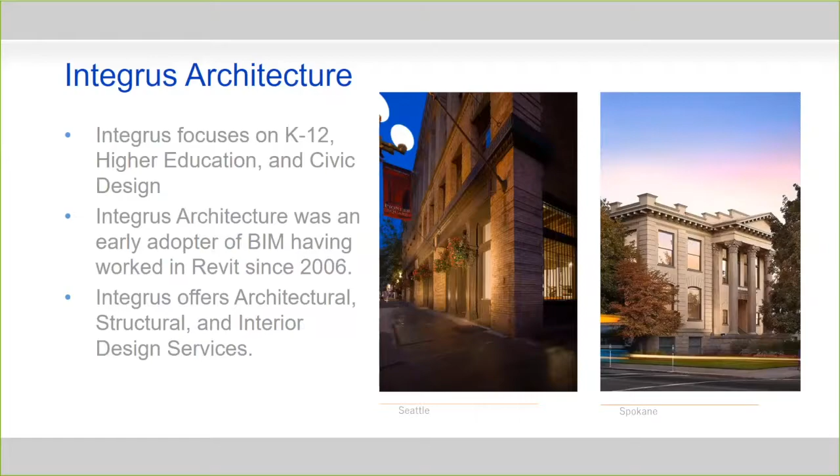And then our course description. The presentation provides case studies of building information modeling and masonry projects using tools available from BIM-M and commercial software. It will also draw on concepts from the document BIM for Masonry, Modeling Masonry Buildings in Autodesk Revit, and we will discuss the importance of BIM when moving from design to construction.

Learning objectives. Learn about current industry tools for use in Revit and masonry to further the building design and detailing. Learn modeling techniques for masonry use in Revit to further your construction documents. The case studies will show how BIM has helped with coordination of building systems such as structural, architectural, and mechanical, and then discuss at the end, if there are some questions, using the case studies, the appropriate amount of modeling for project delivery methods.

So our presentation today, we're going to cover information about BIM-M, why BIM is important, why masonry needed BIM, and what tools are out there currently. We're going to look at 2 case studies further in depth, and we're going to abbreviate another one. They are Park Place Middle School, Whitworth Music Facility, and Tyee Middle School. And then we're going to talk about what we do, some of our tips and tricks. Obviously, everyone has their own, but this is just some of the stuff that we have done and have been doing as a firm.

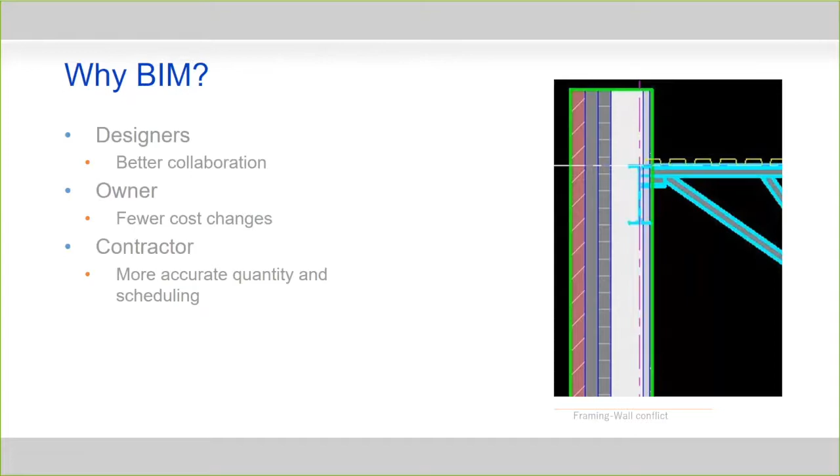So BIM-M is an industry initiative to unify the masonry industry and all supporting industries through development and implementation of BIM for masonry software to facilitate smoother workflows and collaboration across all disciplines from owner, architect, engineer, manufacturer, mason, contractor, construction manager, and maintenance personnel.

And why? The reason is other industries have invested heavily in BIM. I know steel had their own projects, concrete has their own initiative. There's a lot of add-ins for wood, cold form, a lot of national groups. But masonry tended to be more localized in nature. Out here we have the Northwest Concrete Masonry Association. Obviously we have the NCMA. There are also some national groups, but as an industry, it is a lot more localized.

And so the goal is to speed up and provide better tools for the industry. If you had opened up Revit 10 years ago out of the box, there was really nothing for masonry. You had tools for steel, you had tools for concrete, but masonry kind of just got looked over. And so the whole point of BIM-M was to provide resources and tools allowing designers to efficiently move to BIM if you're currently in a CAD format.

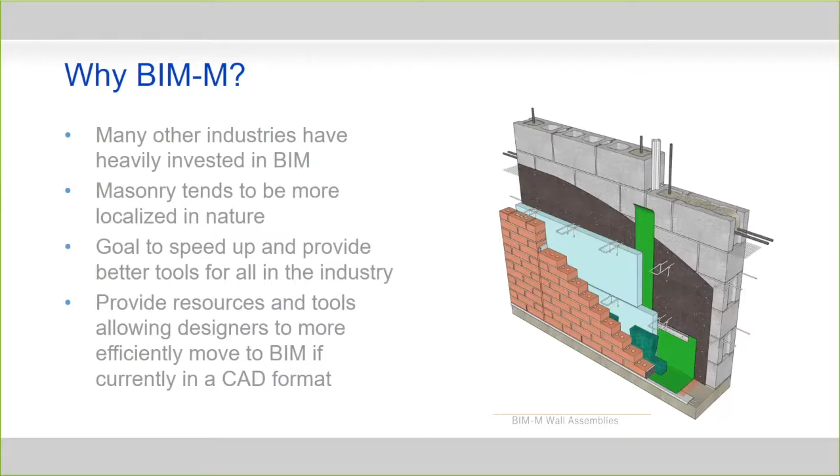And one of the things that they found was some designers were actually shying away from masonry just because it seemed like it was a cumbersome product to use in Revit. And that's what really kicked off the BIM-M initiative.

And so the tools that they have so far created: we have the Masonry Unit Database, which just got released. There was the BIM-M Users Guide, which has been out for about 3 years now. BIM-M has funded CTC Express Tools, which is an add-in for Revit that gives you a whole library of both 3D and 2D content that you can use. So if you're just starting to move to Revit and you don't have a lot of content pre-made in your library, you can use this to help start building that library for you.

And there's also future tools. They're currently working on some more 3D stuff that will help you model bond beams more efficiently, vertical reinforcing more efficiently, and help with the collaboration. So it's something that's put out there for you guys to use. Almost all of it's free. If you go to bimformasonry.org, you can see all this information that's been provided for you.

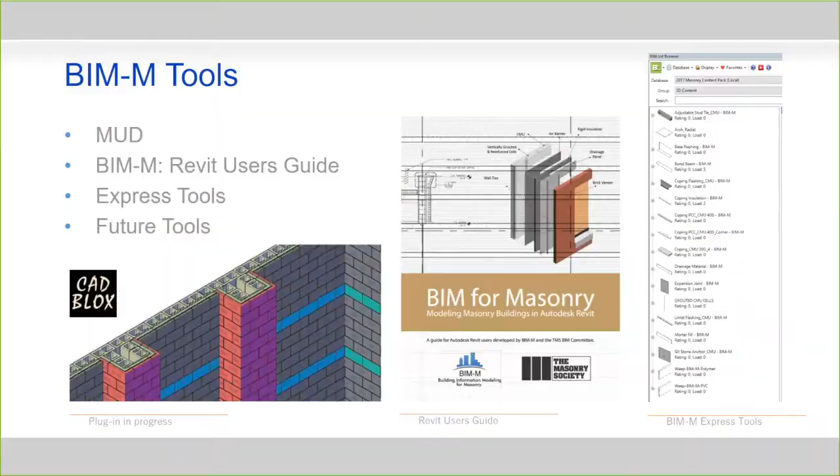And now we're going to get into some of our case studies. Personally, I always love this photo just because it shows going from SD to the final product, and it just does a great job. We start up in SketchUp in the top left, and then the final photo with the students on the right. And you can see kind of a construction model, the design model, the SD model, and some renderings, and kind of just how it all came together.

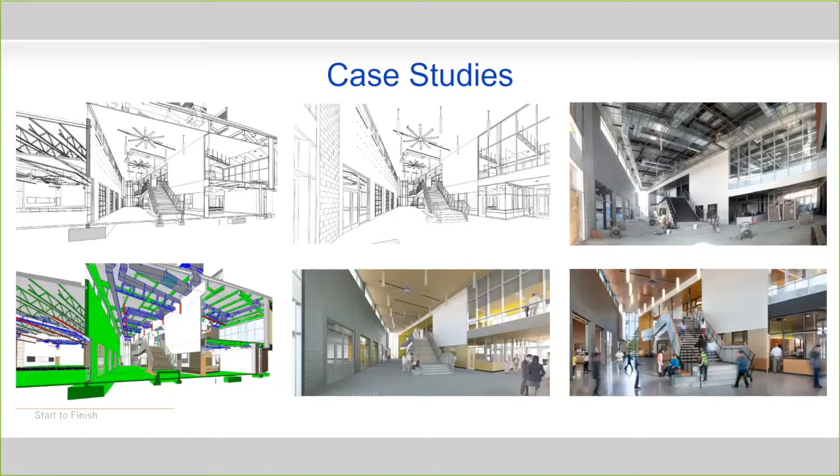So our first case study is Park Place Middle School. It was a brand new middle school and a seismic retrofit of the existing gymnasium. It was 120,000 square feet of new school and a 20,000 square foot renovation. It was done in 2.5 phases. All was done in Revit, including the phase sequencing. On the left side was the existing gym and the off gym addition, and then the right-hand side is the new portion.

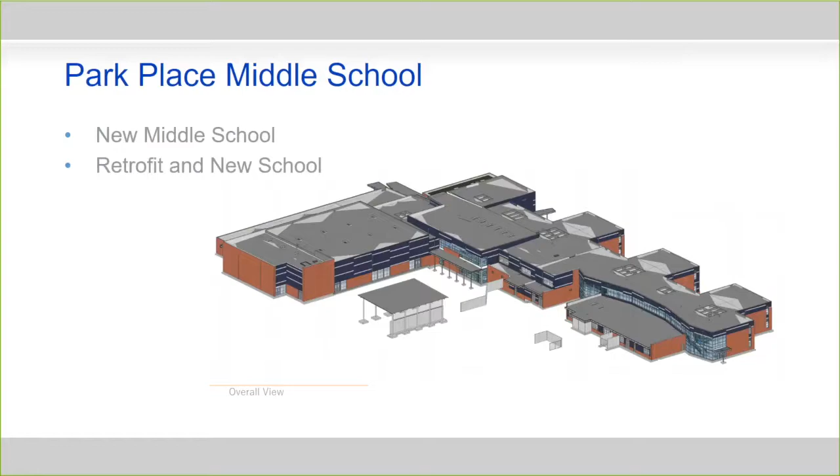And here's a view from the other side. It was all load-bearing CMU with veneer and metal panel siding. Brace frames were proposed, but load-bearing masonry offered a cost-effective solution that allowed us to get that final result we wanted without losing the square footage that comes with brace frames, box-around columns, things of that nature.

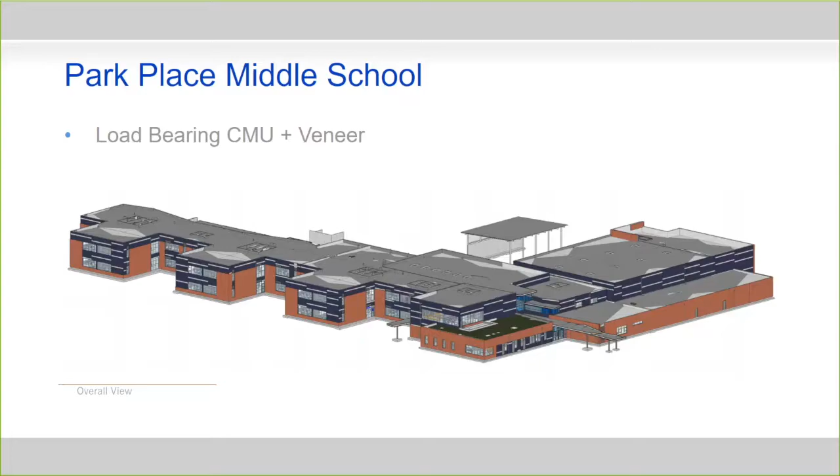So for this project, Revit was a coordination tool and a production tool. It was the first program I opened in the morning and the last program I closed. It was really my main tool for both the construction drawing set and even structural design.

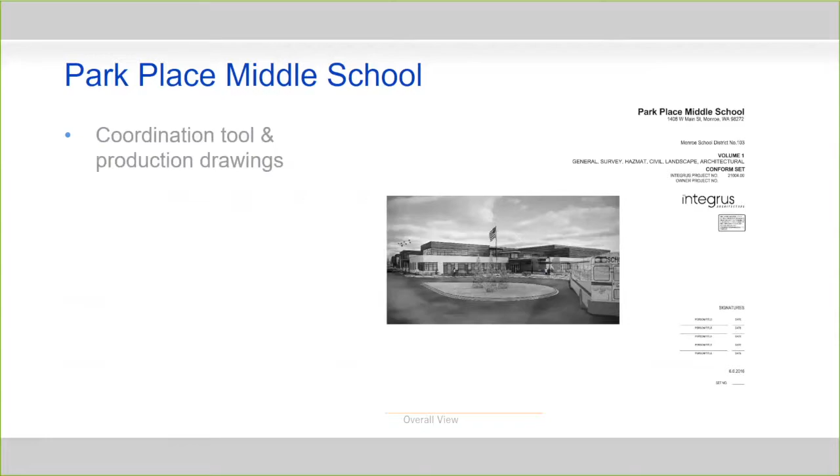So coordination was huge. So for instance, here we have some mechanical ducts, and they're located on the right in red. And we were able to handle issues before they arose. So this took place about 2 weeks before we went out to bid, and we were doing a final sweep through of mechanical, and we noticed that one of the ducts was going to be cutting right through the end of a wall, right where we have really 3 beams coming together and going to be bearing directly over this.

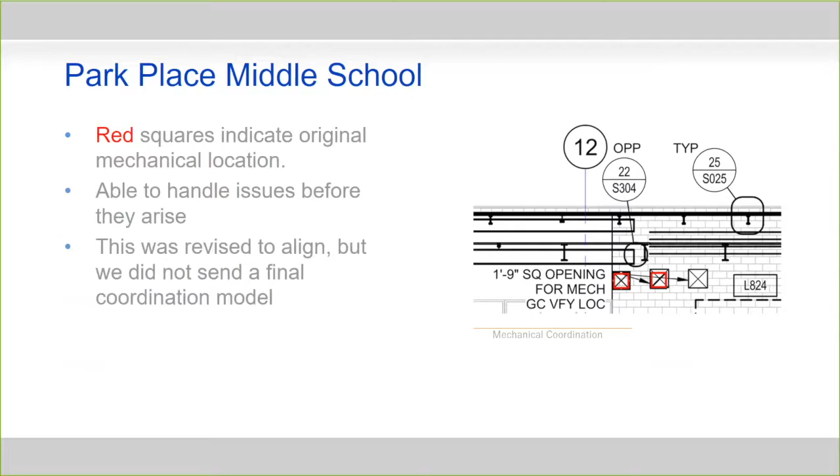Had we not caught this ahead of time, this would have been an RFI, a change order. We would have had to pay for extra duct work to route it around the edge of the wall. So we were able to fix this ahead of time. The reason you're seeing this coordination view is because we caught this right before bid, and so we didn't do a final model swap, but mechanical did shift their ductwork over about 5 feet, cleared the wall, and when I went out on site, no conflicts.

If we go through that same section, you'll notice if you actually measure, we missed it by about an inch. But the biggest advantage is everyone was on the same page. We noted it, the GC saw it. They'll go through and model everything again for their BIM coordination, but it's way easier to catch your mistakes 1 year before it gets built.

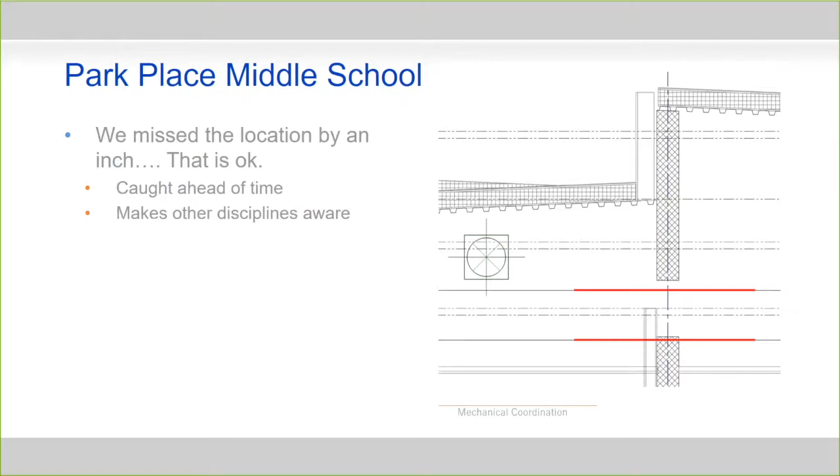We avoided the RFI, like I said. It would have been about 20 feet of duct. They would have had to bring masonry back in. Just a lot of problems get solved. And the delivery method helped on this one as well, because we did have a contractor on board. So not only did we have our own eyes on it, but we had a contractor's eyes on it too, looking for conflicts such as this.

And again, here's another MEP opening we needed. The left was our drawing, and the right was what was built in the field. As you can see on the drawing, I had assumed it was a square opening. On the right, it was 2 round. You can't always guess 100% what the openings are going to be, but the whole point is you're letting people know.

And that's one of the big advantages. We can go through, we can see where the ducts are going to approximately be. If we need to, we can dimension, place 4 feet away from the edge of a beam, things like that. And that's why we also make the note, GC to verify the final size and location. It's just helping make everyone aware. If we don't put this on our drawings, a mason, when they're going through their coordination drawing, they're not going to see it either.

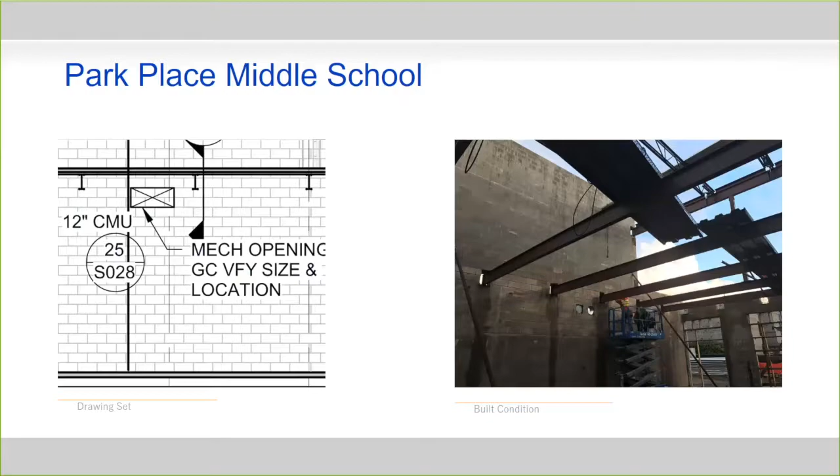One of the things is we don't model everything in Revit. You hear a lot of stuff about people trying to model everything, and it becomes really hard and cumbersome. Here we have a huge amount of reinforcing in this wall due to the opening and the fact it was also a shear wall. And so this would have been really hard to model. So we modeled what we needed to, but we picked up a lot of our own stuff with line work on the base, and then we bring in those other coordination models to make sure that everything will in fact fit. But here you can see our lintels, our vertical bars, everything.

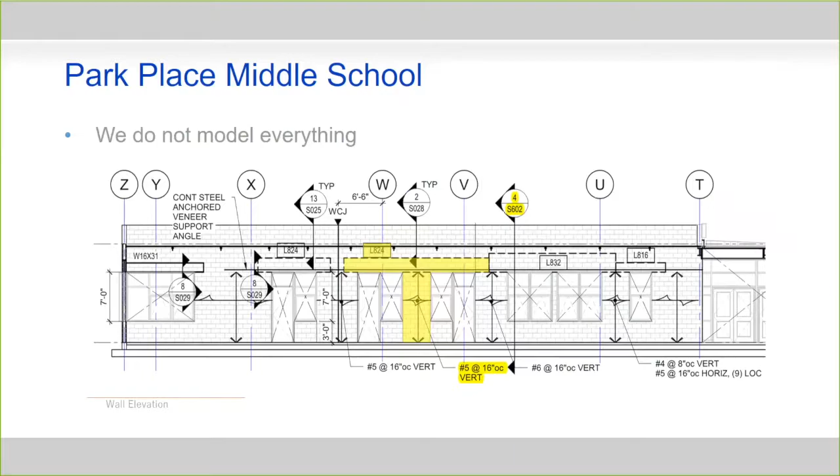But if we go to that building section, we did model things with a purpose. So we modeled our lintels over openings that way they can make sure everything coursed out architecturally. There were no issues with the openings. They weren't going to need to cut anything on site.

In some projects, it wasn't this one, we have modeled certain things like this so a contractor can do a quantity takeoff. So that's really helpful depending on what your deliverable is going to be. And also, if you have conduits or things of that nature, you can look for conflicts, like at the head of a storefront, how stuff is coming together.

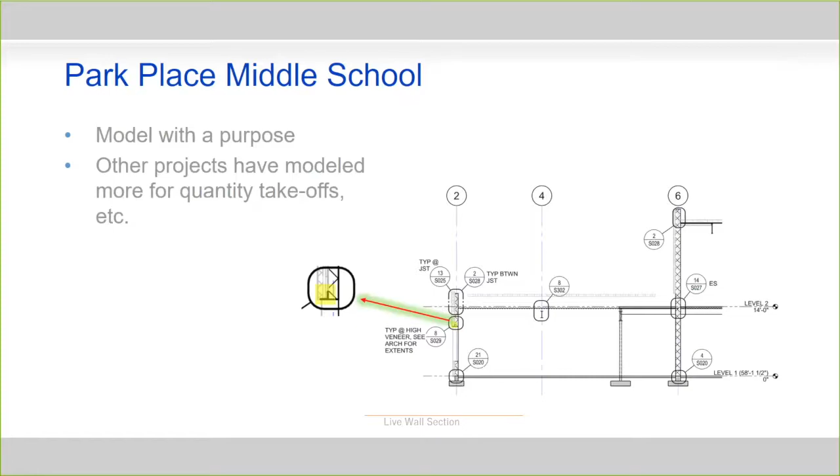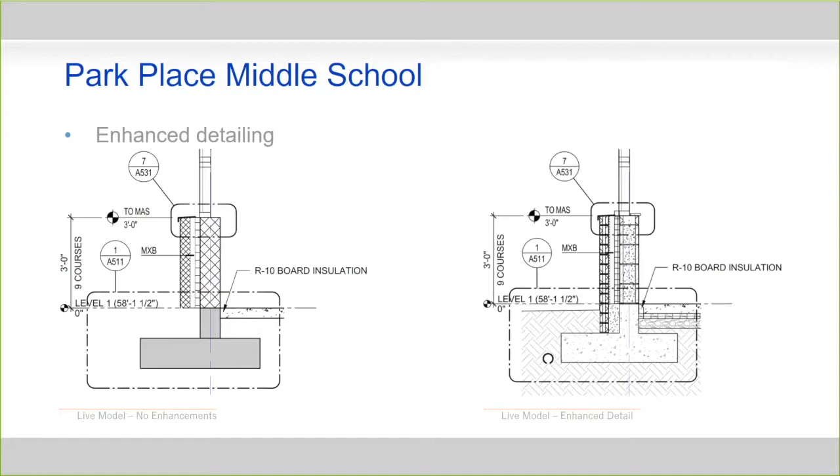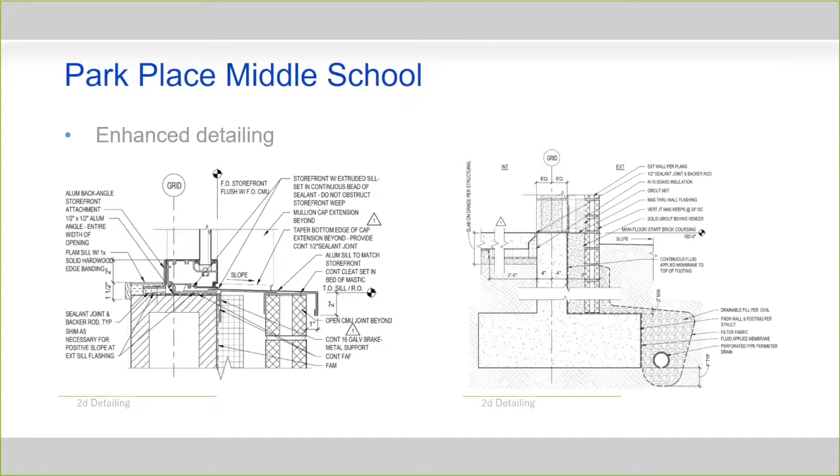And again, here's just another example of that. Within our office too, we'll get people that will use, like this one on the right, a live model and overlay it. And the biggest benefit there is as stuff changes, you'll see your detail component no longer aligns with your model items. So it makes it a lot easier to track changes that way as well. Did something slide you weren't expecting to slide? Because you have these 2D detail components overlaid with the 3D, it's really easy to see conflicts like that.

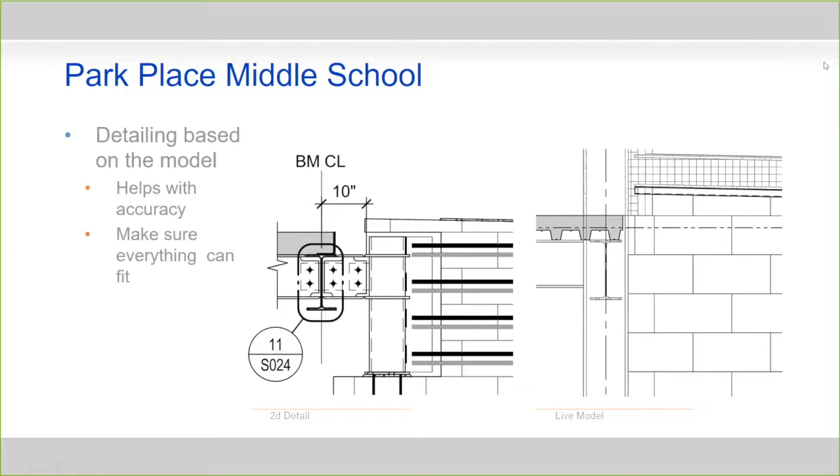So this is a drag strut connection, and as you can see in the model, that beam's 2 inches away from the end of that CMU wall. So I was able to make sure, place it 10 inches away so they could actually get the connection in there and make sure it would all fit.

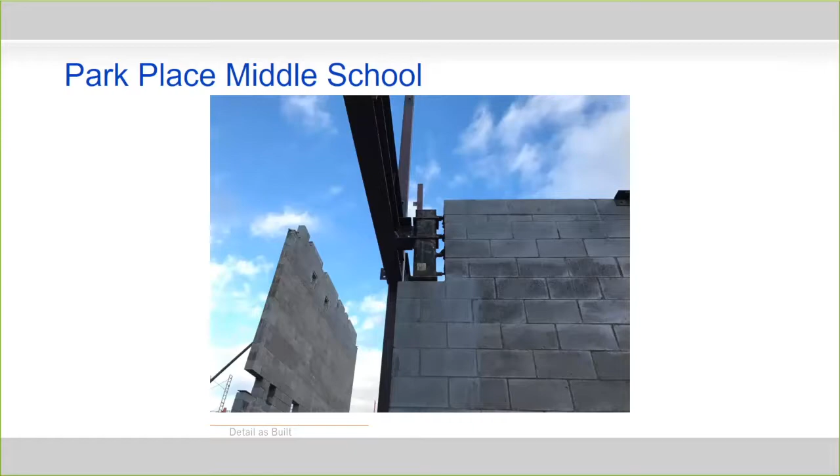And here was the final product, how it turned out. The GC, when they built it, had no problems getting it together. The masons knew exactly what needed to happen, where it needed to be. So by just using the model to enhance our detailing and help figure out problems like this in the construction field, there were no problems. And this was one where I was concerned that we might have had some conflicts.

Another one is our detailing based on as-built. That's another big benefit: we had our as-built for this project for that existing gym retrofit. When we went through, we realized that the existing building was off by 4 inches in the bottom 2 corners. One side was about 2 inches further north, and the other was about 2 inches further south than they were supposed to be.

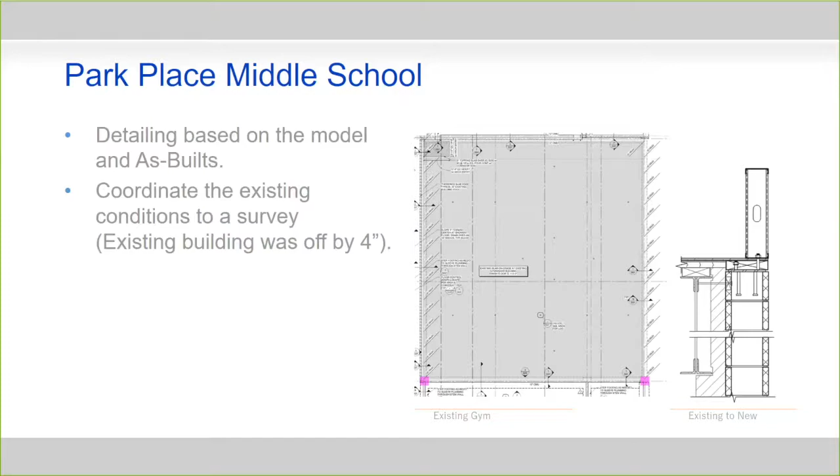And what this allowed us to do was figure out how this is going to exactly come together. The original thought was we were just going to put the new wall tight to the existing wall, but we had this skew we needed to worry about, so it allowed us to look at how we want to connect this. Do we need to look at anything else? How is the existing roof connecting to the new roof? What's the best way to handle something like this?

Our second case study project is the Whitworth Music Facility in North Spokane. This is a new music facility designed to help the program with issues of outgrowing its existing space. We added a 22,000 square foot addition with a minor renovation to the existing structure. The front portion that is seemingly clad in brick was the new addition, and the existing is on the right-hand portion of your image.

Integrus is the proud recipient of the 2017 Robert Fraser Excellence in Masonry Award for this building. We've also received a few recognitions from the AIA as well for this project.

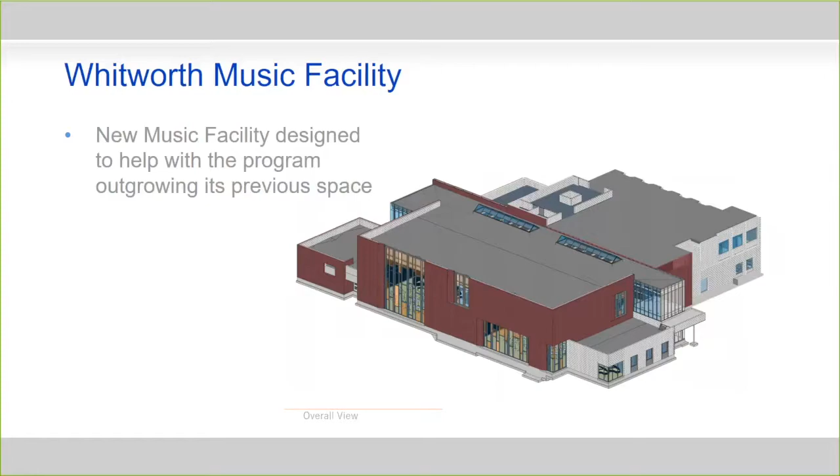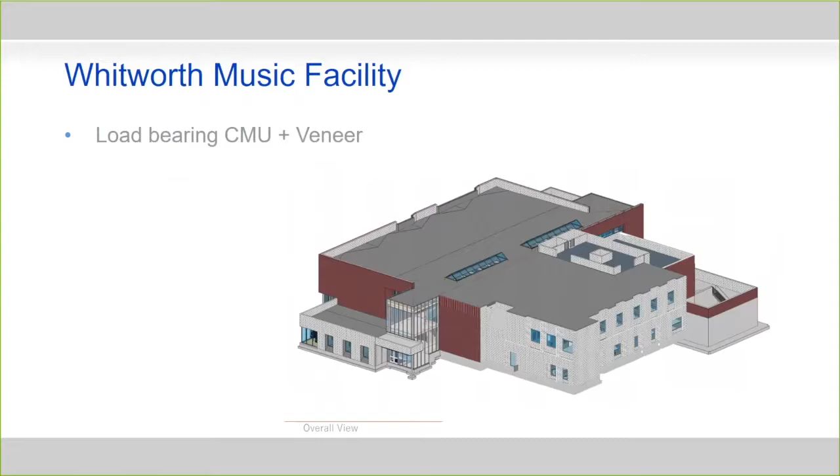So in this project, there was a significant amount of load-bearing CMU and veneer. If you actually look in the lower left-hand corner, I'm going to be discussing this double cantilevered opening, just to give you an idea of reference of where we are on the project. Our biggest feature was, in fact, these double cantilevered lintels. The joists penetrated the lintels. Structural engineers had to detail everything to transfer all these forces.

One of the biggest reasons, as Morgan was discussing a while ago, that we don't model everything, mainly rebar, is that you can see in this kind of an image how much congestion we would have. We are blessed in our market as of right now. We don't have to do all the modeling, but that time is coming. So being on board with how to get things done early is going to save us a whole lot of headaches later on when they do require us to model everything.

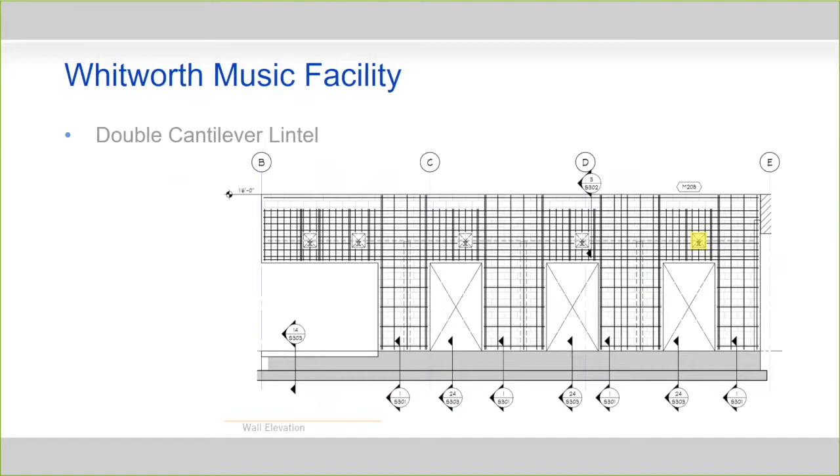As you can tell also, I've got highlighted on the right-hand side one of the openings. The ability to see everything in a 3D model is immeasurable for coordination. Again, this is another perfect example of how congested our rebar can get. The ability to use Revit is, as always, fundamental. We also use Navisworks for clash detection. However, the reality is we're getting so much out of our Revit environment because we're utilizing both structure and architectural teams together.

In this portion, there is a 40-foot main lintel adjacent to a 10-foot corner lintel that connects to the other side that you kind of saw in the previous picture. This is also the same corner that I showed two slides earlier, that corner condition of window glazing. Thankfully, on this side, we didn't have any penetration through, creating an easy coordination with our consultants. Our hyper-modeling, while maintaining low data for things like the rebar, allowed us to preemptively coordinate everything, and we completely eliminated RFIs on anything related to the masonry and our double cantilevered lintels.

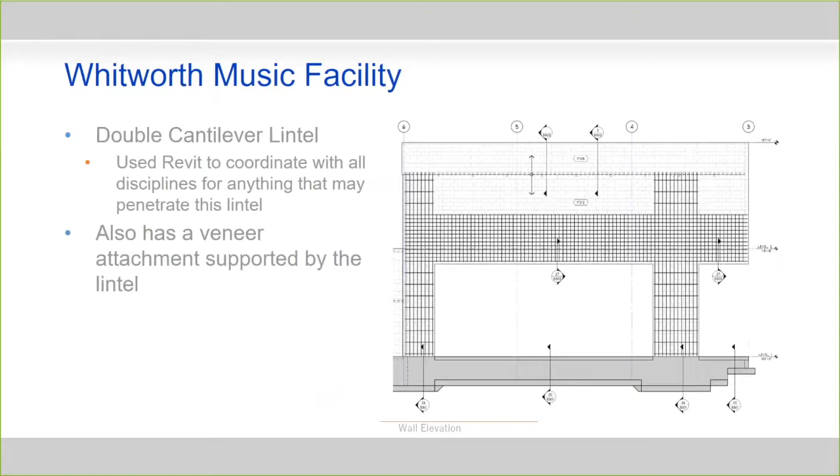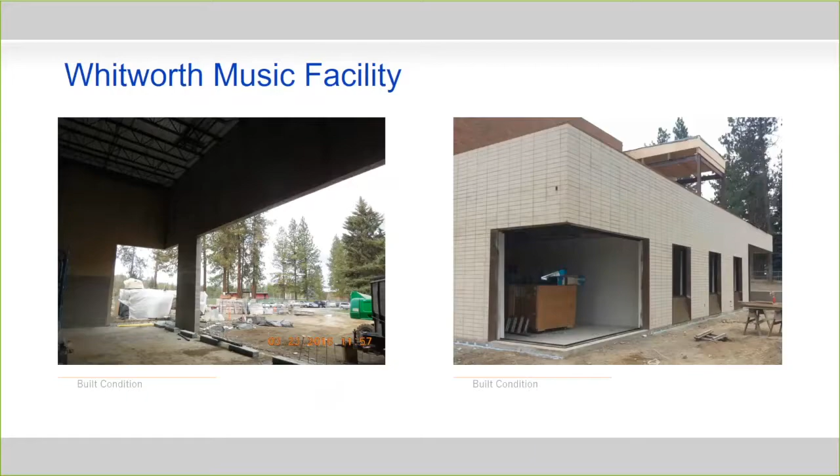Here's a simple view of the two different double cantilevers. The smaller, shorter one on the right is the one that I was actually highlighting a while ago. The larger one on the left is the 40-foot opening that you saw in the previous slide showing all that rebar. And then there's this final image of the finished product. Admittedly, this image, in my opinion, doesn't do justice to the project. The client has been so content with the result and the cost savings due to the lack of RFIs and the clarity and coordination that we had, that they actually immediately turned around and hired us for two more projects. And they put a special emphasis on more CMU and masonry to be used on those projects for the sake of continuity across the campus.

We've also received incredible praise from the students. One of them is a piano player. You can see that this front corner room right here is actually the piano practice facility. They praise the fact that they've got this open view to the whole campus.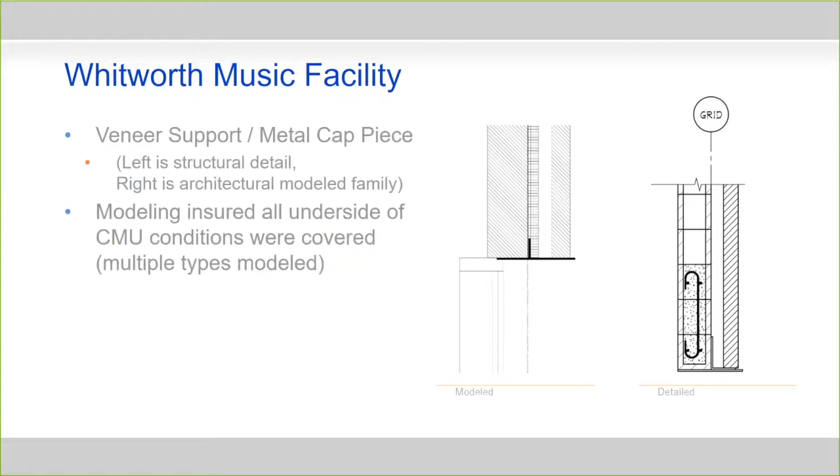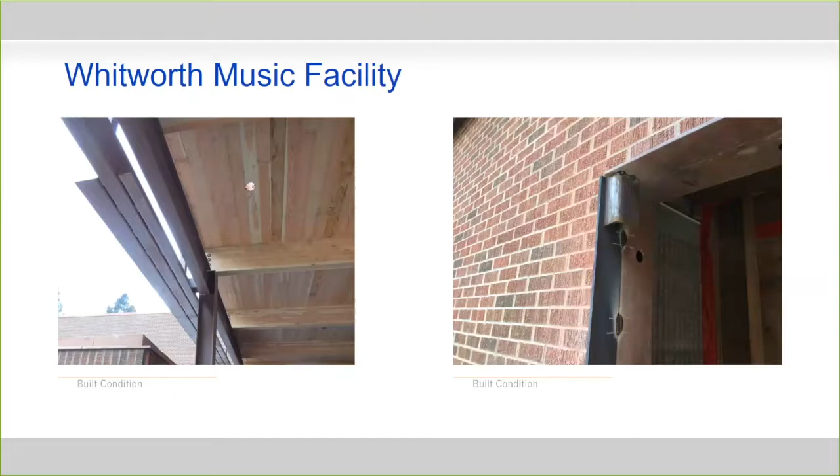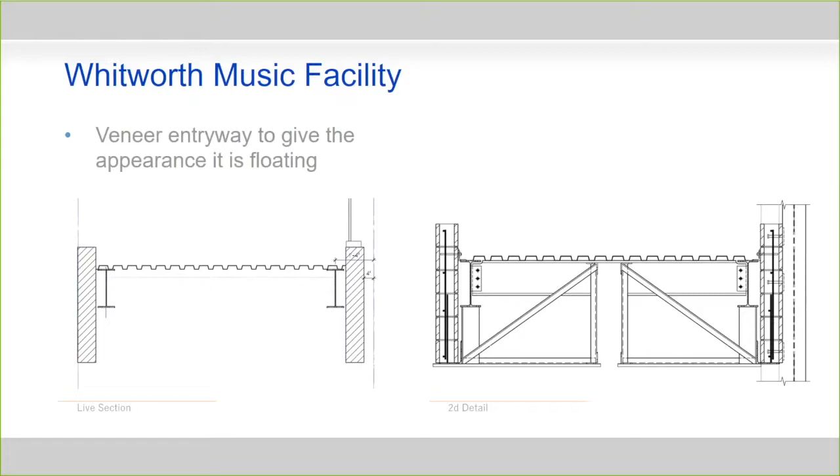To beat a little bit of a dead horse here, here's another slide showing the difference between the live section. Now, admittedly, this live section doesn't go deep enough to show, but we have modeled the rest of the beams. However, on the right-hand side, what you're seeing is the 2D detailed element of everything for the construction documents. And here they are overlapped. So really, we're getting everything accurately drawn for them. We're getting everything taken off properly. And that's all the information we have. So not everything needs to be modeled up front, but sooner or later it's going to show up. It's going to be clear as can be.

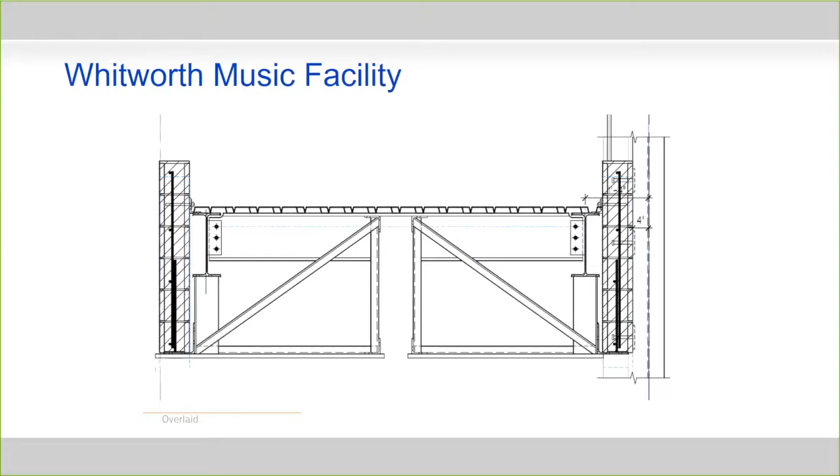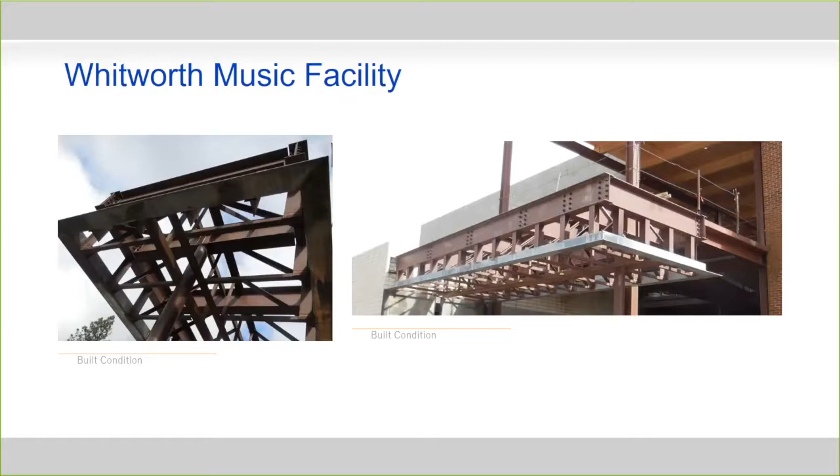The end result in this condition is a very nice floating looking section of masonry. The walkway looks like it has just this nice thin wafer hanging over it. We have stood on site and just watched people walk in, and they walk in with this look towards the sky like something's about to fall on them, yet it's just beautifully coordinated.

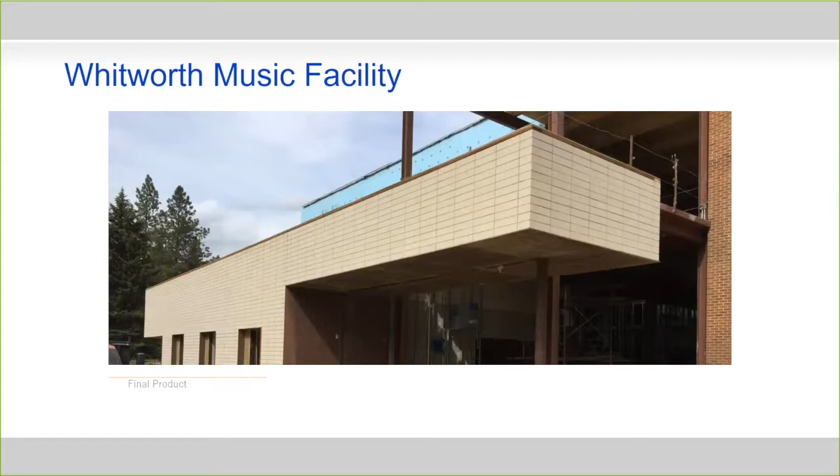So now we're going to talk about Tyee Middle School, which is in Bellevue, and we're going to just talk a couple highlighted elements of some of the BIM use when we were working with masonry on this project. So one of the first things is coordination. So our consultant in this one was using 2D AutoCAD. This project took place right after the firm became a full user of Revit. Our consultants weren't required to be full users of Revit at that point.

The reason is when you're working on those 2D, a lot of the time it was simple lines. The coordination was hard to overlay. And here, even though we were in Revit, because our consultant wasn't, we weren't able to catch these ahead of time. So it became an RFI, go through that whole process, having to do field fixes. The project slows up a little bit. So it really shows how you can catch stuff ahead of time. It really helps you with your whole team being in Revit.

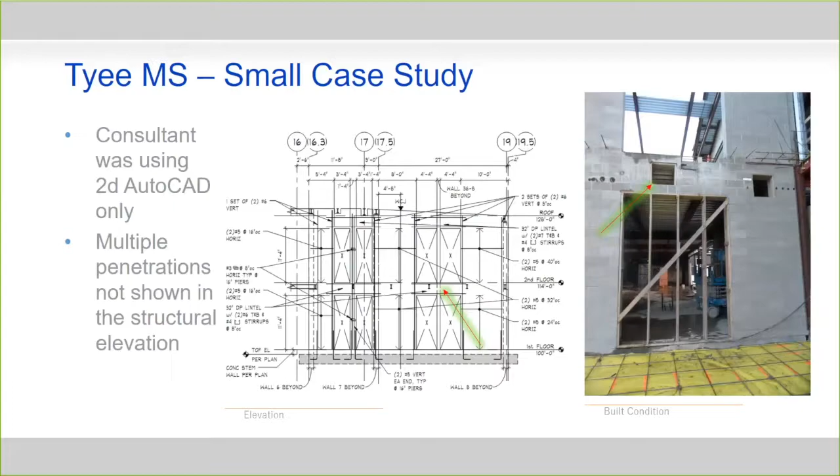And general contractors, too, are getting on board with BIM and Revit. On all the projects I've been on now, they're doing Navisworks collaboration, Navisworks coordination. Some of them are even starting to give us submittals that they did in Revit for their self-perform packages.

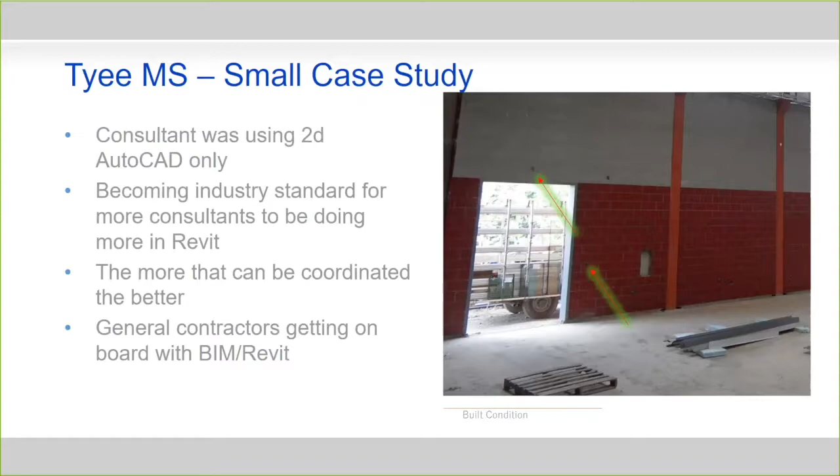And the last one from Tyee was a high window. So the window basically went to the underside of the beam, and because of the construction, they needed a solid surface to mount to. And if we had our standard beam pocket at some of these windows, it wouldn't have been constructible because the glazing install would have happened before they were able to do the grout backs at the beam pockets.

So instead, we were able to coordinate it, notice the issue with these beam pockets and how the storefront was going to be installed, and we were able to go through and switch to these embed plates. We went through the entire project and swept for all these conditions. And it was, again, someone in BIM noticed it and said, oh, we might have this potential problem. And they went through and talked to a GC and said, yeah, you're going to have a constructability issue. So again, solving problems before they happen.

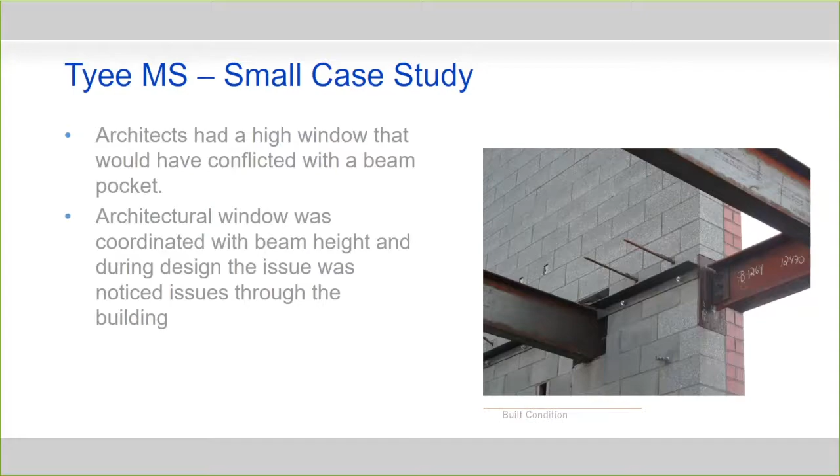So our design and documentation process includes a myriad of software solutions. Revit is obviously the biggest one. There's other solutions. There's ArchiCAD. There's SolidWorks. There are other solutions. We also leverage Navisworks in-house. We also have other software such as Enscape for our presentations. We've been dabbling with Google Cardboard for walkthroughs at different stages of construction.

Navisworks allows us to do some quantity takeoff as well as the clash detection. And then there's other new ones to the market, such as the CTC tools, the Express tools that Morgan was mentioning earlier. CTC Express Tools is actually supported by the BIM for Masonry organization. It has a myriad of stuff in there. It's updated frequently, so that's definitely something to look into.

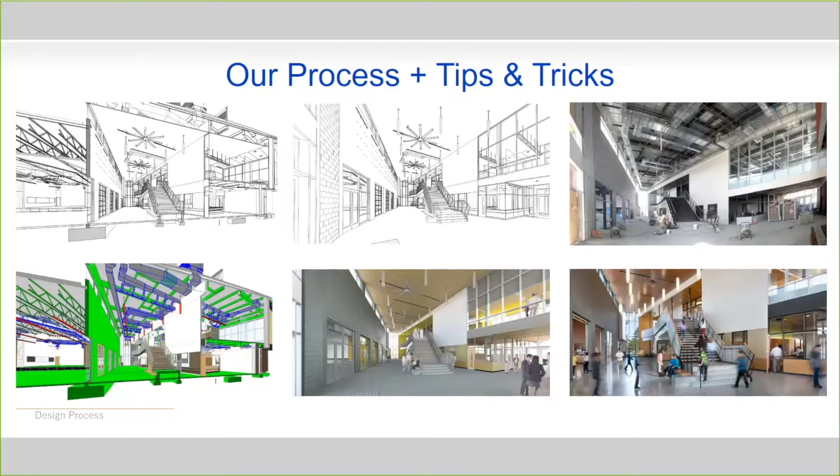When we discussed this image earlier, it's just a great representation of how everything comes together in a way that is accurate based on what our design intent was and everything we did for coordination. So you've heard us discuss a little bit the idea of a one model. We are admittedly blessed. We have structural and architectural and interior design all in-house. It allows us to reduce the duplication of information.

The majority of firms in the industry, what is happening is that the architect is drawing something to show his intent. The structural engineer is using, within Revit, for example, the copy monitor tool for load-bearing walls. The architect is having to coordinate with that. It creates a duplication of effort, which is duplicated man hours and therefore a loss of profit for everybody. The other beauty of a one model environment is that it forces more collaboration. That collaboration inherently creates more cohesive team members, and a more cohesive team is just better for everybody.

There's obviously, as we've discussed several times, the near instant clash detection, and then there's the non-project specific changes, the increase in communication like we were saying, and then lastly is the rise in profit. For many years, actually, when we first integrated Revit, we were using the traditional path where the structural team had its own model and the architectural team had a model as well. Our coordination was definitively better than most environments where you're in two separate buildings. However, we realized that being in a one model environment was a fundamental thing that we had to invest in.

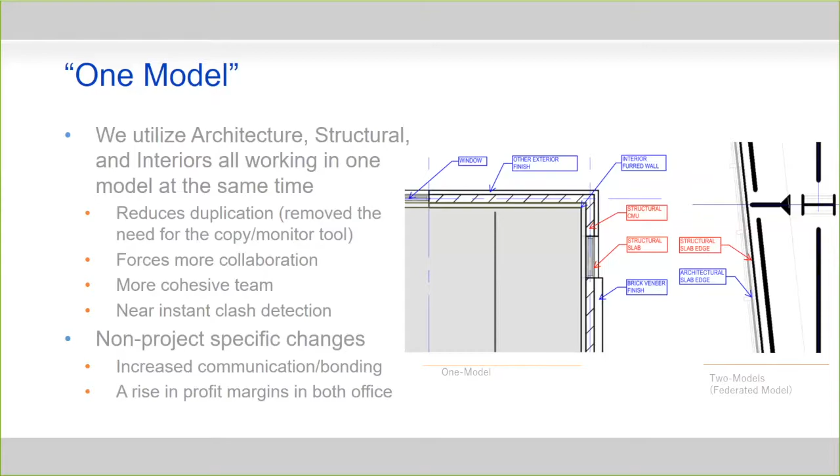So we're going to discuss a few things that we do for our modeling. One of the things we do, I didn't put it on the insert here, however, we also often have separate walls for our structural and our architectural teams. So we break down the walls to a structural level that allows the structural team to manipulate their walls, and then we skin it with a finished architectural wall in front of that. It sounds a little bit more tedious. However, it actually lowers the number of wall types you have.

The number one problem I see is teams will try to make a wall type that goes from the interior face all the way to the exterior face, where it includes everything from the CMU to the studs to the drywall to the brick veneer on the outside. And the problem is literally you will turn the corner around the building and you'll wind up with a different condition. So they have to make a whole new wall type to answer to that one

specific condition. If you break it down so that your interior furring and drywall finish is one wall type, chances are you're using that elsewhere. And then the middle core of CMU is a second wall type. Chances are you're using that somewhere else. And your exterior finish literally handles just the airspace and the brick veneer. Yes, it makes it a little bit more confusing because you've got three wall types, but the reality is it's so much easier for the users to manipulate and change things.

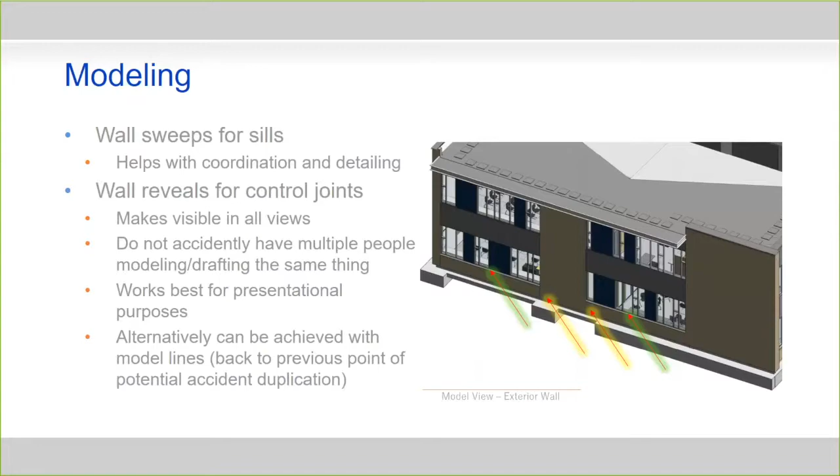Apologies here. So the wall sweeps, like I was saying, you get to see it in your 3D, you'll obviously get to see it also in your plan, or your section in this condition. What we're not seeing, because it was actually fixed before we were able to take a picture, on this right-hand side, was that the stone sill was floating a little bit too far. It allowed us to catch that. We were able to add some support behind that using steel.

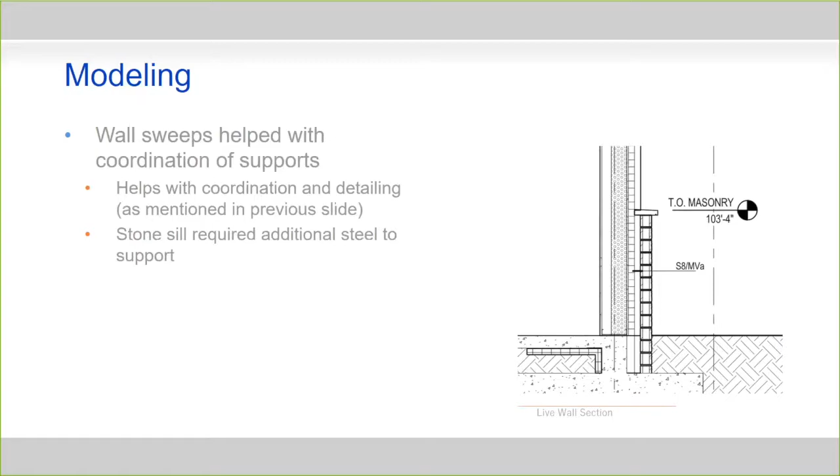Modeling basics. Keep it simple, stupid. I'm not calling people stupid. I just like to say keep it simple, stupid. The biggest reason why: what happens if somebody leaves that team, they decide they want to live back close to mom and dad, they moved across the country, they got hit by a bus on the way into work tomorrow morning? What happens if somebody is modeling something in an overly complex manner? The keep it simple, stupid method is, in my opinion, a foolproof way of doing it. It also helps keep it lean.

And then next up is don't be afraid to explore. Users will ask me on a regular basis, hey Rob, how can I do such and such? I will tell them, trial and error. Take the section that you're looking at modifying, copy it, paste it into a new project, what I like to call mock projects. Just dump it in there, test your idea, see if it works, see if it doesn't work. That way you're not doing it in the actual model. And then last but not least, Dr. G, good old Google, it doesn't hurt to dig in to try and find new ways of doing things.

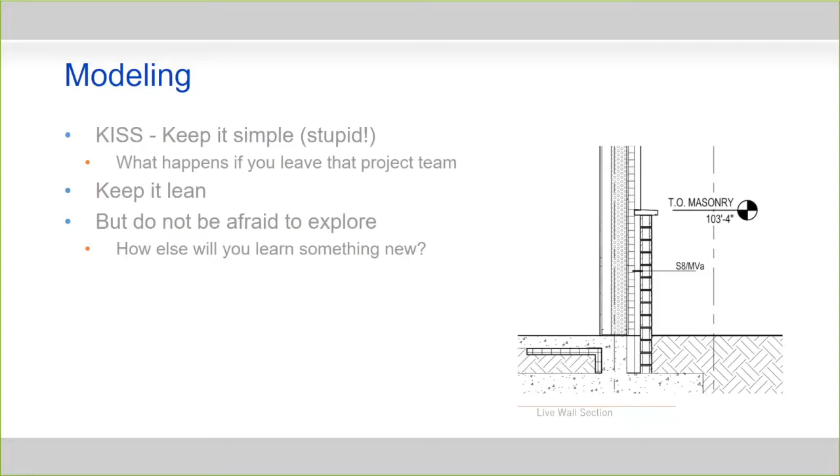So for reinforcing, we still use 2D reinforcing for a lot of our purposes. As you saw in some of the case studies earlier, it's a lot of line work. It requires a little extra coordination, but it is faster to draw. It is really easy to do line work versus modeling rebar, especially in masonry, making sure you're on course, right elevation, right offsets from the wall face. The main reason we don't utilize 3D reinforcing is changes, time and model size.

For instance, in Park Place, there was that one wall that had a lot of openings in it, that would have a lot of hairpin ties. Modeling something like that, if anything changed on that wall, it would be very time consuming to go back and remodel all that. If the windows shifted, 2 of them shifted 8 inches and 1 grew by 4, that would take a really long time to go through and update all that rebar.

And that goes along with the time. As everyone knows, it seems like our projects keep getting tighter and tighter time schedules. So trying to overcome all that time we spent remodeling is just not worth it. And the last is model size.

2D line work, it's a dumb item. It doesn't hold any information. However, it's really quick and easy to change versus that 3D reinforcing. It holds material properties, the weight of the rebar, the diameter, all of that information, and that takes up more memory. So if you were to go through and model all that, you could really start to bog down your model. Using the 2D reinforcing still provides benefits.

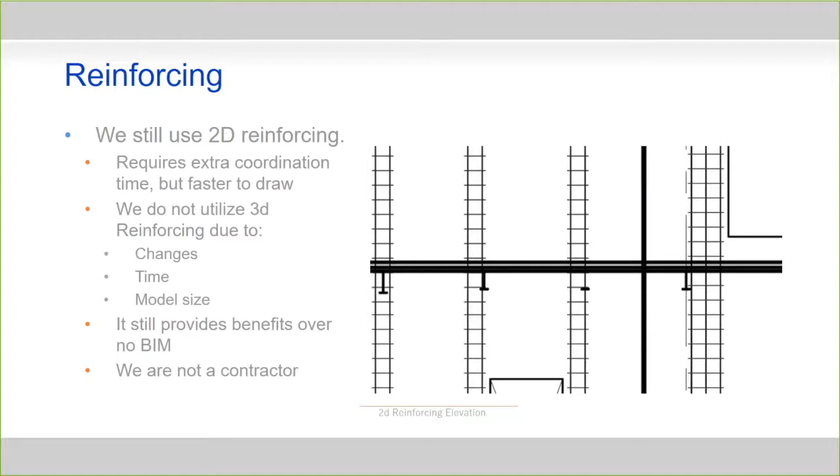And lastly, we're not a contractor. We're not doing quantity takeoffs in our office. It's not part of what we do. So that's really where something like modeling all the reinforcing would be beneficial, if you're a contractor and want to get that perfectly accurate quantity takeoff.

So we do use live sections to create these details. As we had mentioned previously, we took the section cut, see how everything fits together, and then we overlay them with 2D components. That way it's nice and light, but we know everything fits. And when you're working with the plan and detail views, you can align stuff.

I'll talk about it in a second, but one of the ways I work is I'll align and copy them back and forth and make sure the 2 details actually align. So if I'm showing my bars on the inside face in one detail, I make sure they're on the inside face on my other detail as well.

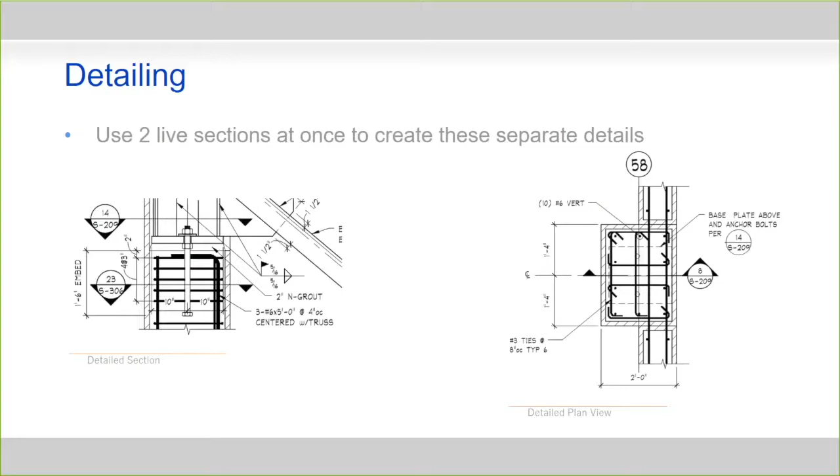And so this is that process I was talking about. I cut one section in elevation, and I'll cut another one in plan. Typically, I'll lay out my detail in the elevation, move to that plan detail, and just copy all the 2D line work above. And then I'll use reference lines, and I can make sure everything aligns.

Because one of the problems if you're not doing this, it's really easy to think, oh, I have my ties here, but you might swap something, and then you get in the field and nothing fits. There have been some times, if it's been really congested, I have used some 3D reinforcing to make sure it fits. I'll work between sections, but then I'll come back and overlay that with the 2D. That way I have a nice light model. So you can use that 3D to help make sure everything's going to fit.

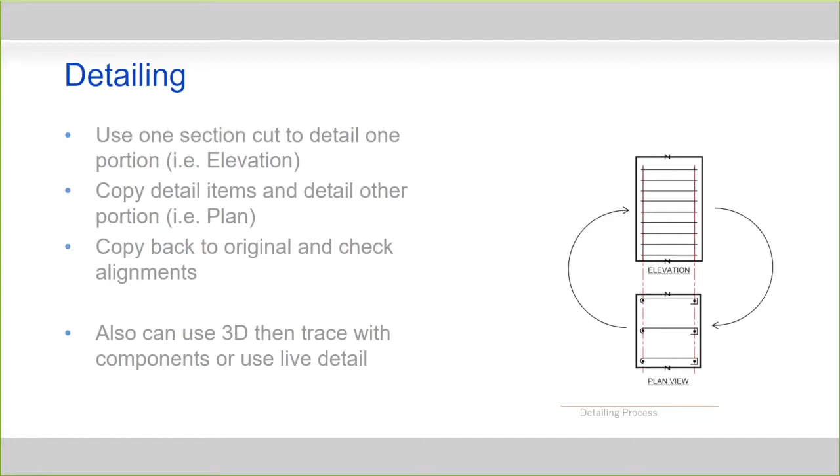So our current deliverables, we mainly perform design-bid-build projects and design-build. And most of our projects, we go typically to an LOD of 300 or 350. The reason for that is, like I said, we're not a contractor. A lot of our projects don't have them on board. The ones where we do have them on board in design-build, those are the ones we'll go a little bit further because the contractor has that additional benefit.

But for us, there's little benefit, and stuff changes post-bid as well. With that higher level of development, you have more fees, so you have to go a little bit further. You have to make it worth it for the owner. In the private sector, obviously going to a higher level of development would make a lot more sense. You're going to have the owner and the contractor on board.

Sometimes I've heard case studies on projects where they've been able to skip the shop drawing phase or greatly reduce it, because you actually have the shop drawing guys doing that portion of modeling for you. So as an engineer, you would send your rebar markups to them, and then they would detail it for you.

And the hardest issue of all is getting building officials on board. Right now, they don't have a lot of Revit experience. How do you document something in a model for a building official? How do you go through the permitting process and have them buy off on something like that?

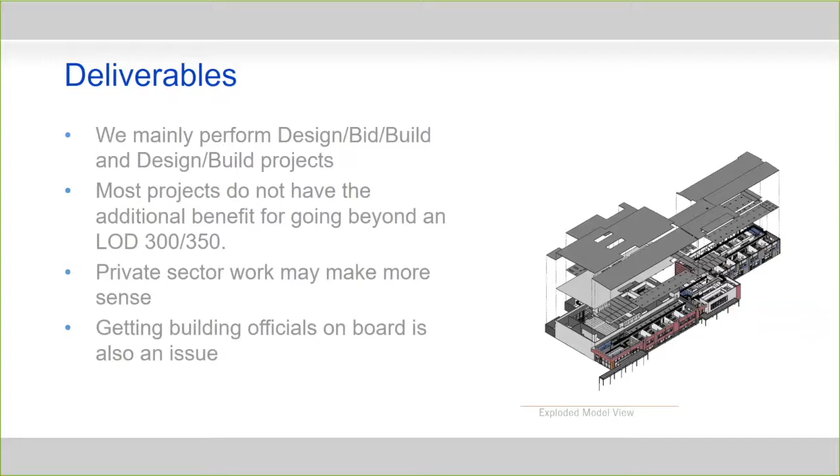So to come back to the discussion of some current industry tools, obviously, as I was mentioning, we've got Revit, ArchiCAD, and Vectorworks for your base drafting and modeling software. The BIM-M Revit User's Guide, we've been contracted ourselves to do some videos. They have been released on the BIM-M website, so that is a resource that's available for people for learning.

There are plugins. Dynamo is probably one that you may have heard of in the last, I'm going to say, few years. It is not the easiest thing to learn. This is one of those things. I love Dynamo. However, I have my reservations against it because of the good old keep it simple rule. A Dynamo user today may not be here tomorrow, and I might be limited by what I'm able to manipulate in the model. There is also the CTC Express tools that, again, BIM-M Group has been backing.

There are other tools like Hatch 22. It's a tool that helps you make some hatch patterns. Admittedly, there's already a significant amount of hatch patterns already created and available if you just take good old Google. But admittedly, on almost a weekly basis, I will have somebody come up to me and say, hey, Rob, I need yet another hatch pattern. We're using a specialty veneer, a specialty size, you name it, specialty brick, and so on. So I'm constantly making new hatch patterns for my users.

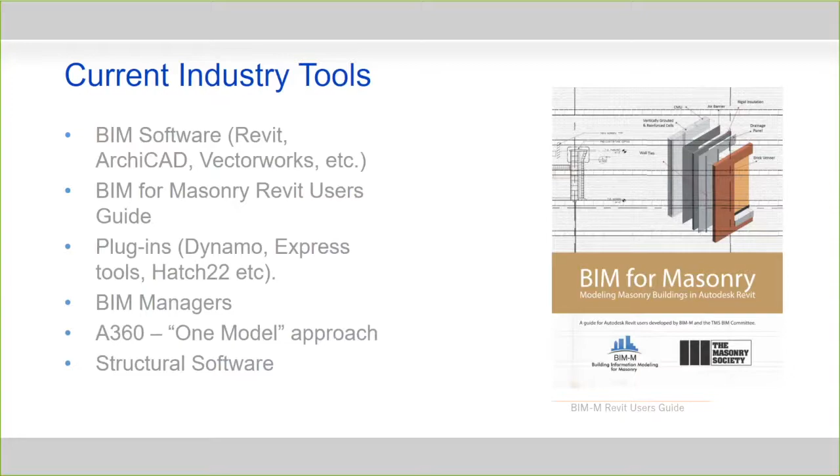And then there's a plethora of structural software. Of course, now I'm blanking on the names of them. Tedds is one of them. Yeah, and there's a lot of them. They're starting to integrate with Revit, and that's what they're really working on. I think Tekla has one, I believe. There's a lot of them out there that are all trying to find ways to integrate with Revit, and it seems like every year they're getting better at doing it.

Another tool is listening to webinars. On that, we thank you for joining us on our webinars. There is also good old YouTube. And then if you become a little bit of an expert, teaching others is an invaluable thing because teaching leads to learning. I so often find out new things or remember things that I hadn't done in a long time because somebody has come up to me and said, hey, can you teach me about name the tool, and I wind up in a rabbit hole of new features or old features that I just completely forgot about.

And then the last one, like I said, trial and error, mock projects. You cannot go wrong, in my opinion, with firing something up, copying from one project and dumping it into the next.

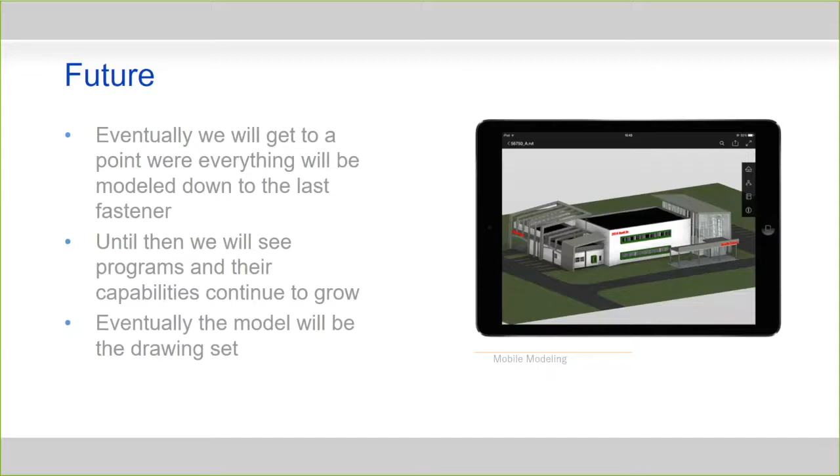So, obviously they were pushing the envelope quite a bit. They had to get their building official on board, but they were able to cut a lot of time out of their schedule by not having any 2D drawings as part of their deliverables. Shop drawings were 3D. The whole thing was a 3-dimensional model. So it is something that's coming. Some people are starting to do it, and we'll just see where it goes from there.